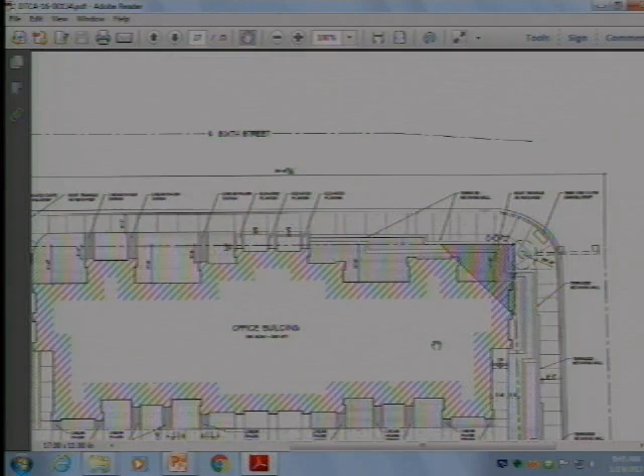In the previous design, when the retaining walls were curved, it looked like there was a larger distance between the sidewalk and the walls.

No, are the new walls any further out? The only place, and I say no. Let me recount that. There would have been a place that, when we relieved the inside of the curve, that would have given more relief, which was also why we chose to go that direction at that point. And my client actually liked it quite a bit and argued with me when I went back to show them, hey, we need to do this.

I left this meeting thinking, okay, you know what, I think the comments that you guys gave were constructive and certainly helped us get to what I believe to be a better solution here. I think this does do the things we're asking it to do from a design standpoint. We're asking it to be more like the building and kind of transition you to the street level, so I think we've achieved that.

But we do give up some things, with the kind of linear shapes of things, yes absolutely, we give up some of that relief off of the street. I think aesthetically it's a great improvement compared to before, having the site match and work with the building design.

I'm not as... so on 6th Street, that sidewalk, the way it exists right now is out at that curb line, and given the setback of the building on the site on 6th, you experience some relief on your other side as well. So I'm not terribly concerned with Sixth.

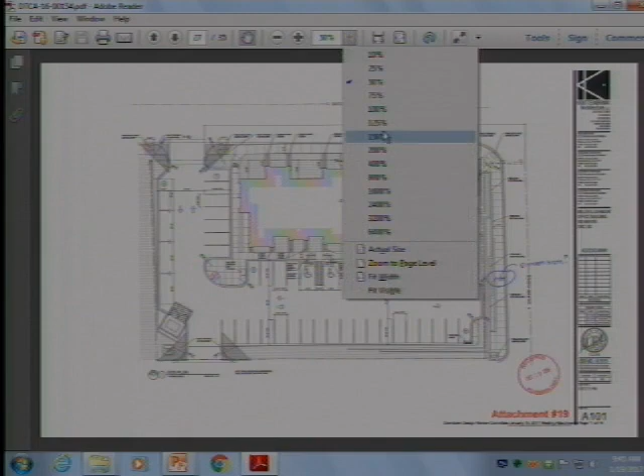The pinch point on the east side, I could see that getting tight, and certainly with the retaining wall on your other side, you get almost a canyon effect of street on one side and retaining wall on the other. So if there's any way to pull those walls in tighter to the site, I think that would be beneficial to the sidewalk experience.

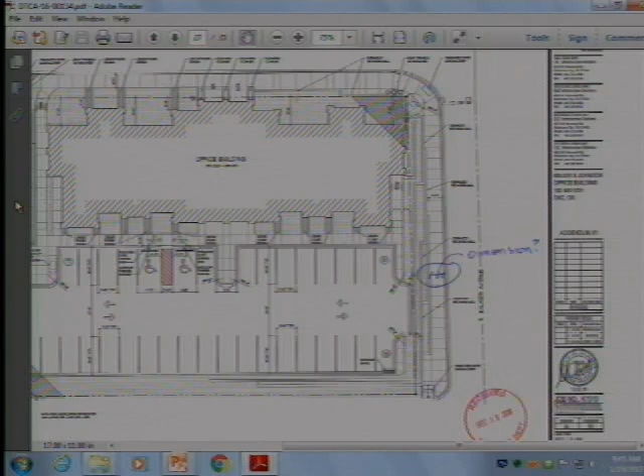It comes in an aesthetic, I think it's going to come in an aesthetic cost, because the terracing is what we're basically disguising. I mean, if you want me to remove the terracing, then we're going to have a wall, and none of you are going to like that wall. You know what I'm saying? So I'm relieving the eye with the terracing, relieving that aesthetic. I believe there's just a small amount of give and take here.

It's either we can go that direction, give you more room on the sidewalk and remove some of that — it's going to be less cost to my owner, he'll certainly be happy about that, because cost is certainly an issue in all of this. Some of the comments that Connie's made here relate to going to cast in place. That sounds all good and well, but you're talking about at least a couple of different disciplines as well. So this stacking of this type of stone, the cost is in the material, not in the labor. The labor is very cheap to stack this kind of stone, and it's very adequate for what this use is.

Is there anything planned around the parking lot as far as a guardrail condition or? There are not. Code-wise, we do meet the requirement there — that's the 18 inches of fall, 30 inches out. So we meet the requirement.

However, I'm not opposed to adding a couple of bollards there just to put everybody at ease at the end of that hammerhead. We could certainly do that — I would say probably three, two at either end and one in the middle, would probably cover it.

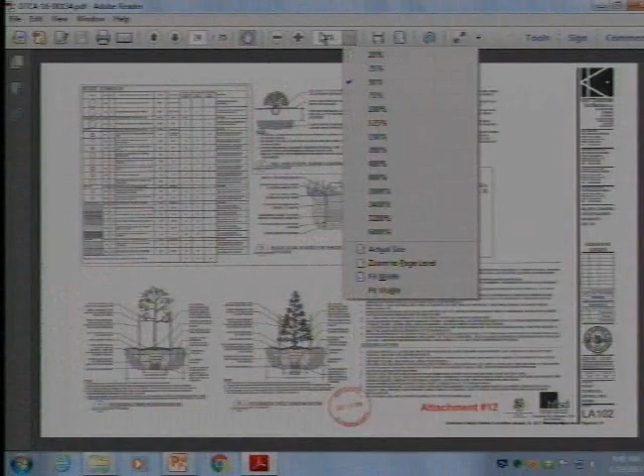Well, I'm with Betsy. I really like the design. I think it's a dramatic improvement, and it really dramatically highlights the building. I don't think there's an enormous amount of pedestrian traffic there, and I don't think there ever will be, so I'm not that concerned about the width of the sidewalk. So, I like what you've done.

Do you want to make a motion or anything like that?

I just have a couple of comments. I think the materiality, I understand the cost, but I still am not on board with the materials. I guess I tend to agree with Connie that it's still kind of residential looking block to me, and I don't see the relationship between that block and the building. Is there even the scale of the block? I guess that's a good question that Connie had about the materials.

Similar in scale to the cast stone, or is it the typical CMU? The cast stone is 1 by 2, so 12 by 24, and the block is going to be 8 by 18, so it's a larger linear piece as well. I think scale-wise it's appropriate. Each of these blocks, this is not residential. This is not something you could use in residential, you wouldn't want to, it's just too costly. But they're 80 pounds a piece. They're literally a massive block. So I don't think they're going to play that way.

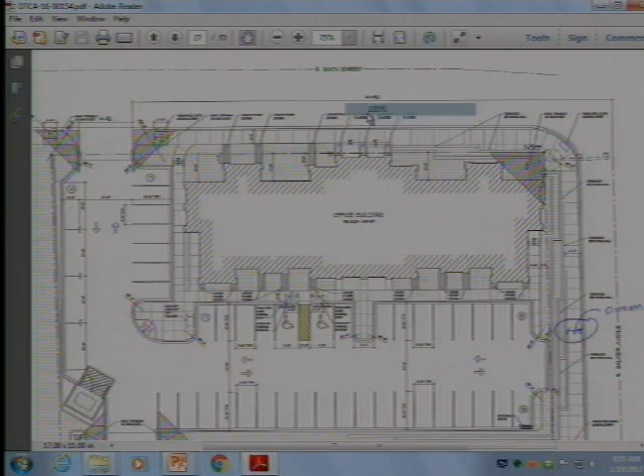It would have not allowed me to have an entrance on the north side of the property there. I mean, you can see how tight all of that is. I am crammed on this thing at all angles, really. And then I'm required also to be within that 10 feet, which we had to get a variance for, those kinds of things. So I'm jamming my building up on this corner. It's obviously going to make me have to react—it's forced congestion, if you ask me.

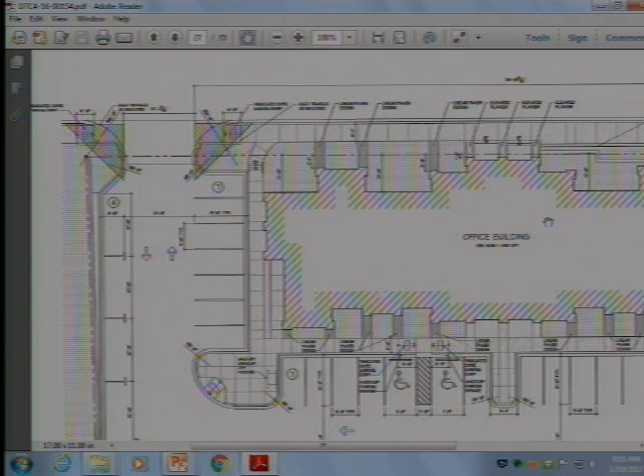What I thought about that—there are ways to site that potentially a little bit differently, but the only space that I have really is coming back further, which would then cost me more. Coming further south—I'm sorry, not really east to west. East to west, there's just not much there, guys. I don't know what else to do with it.

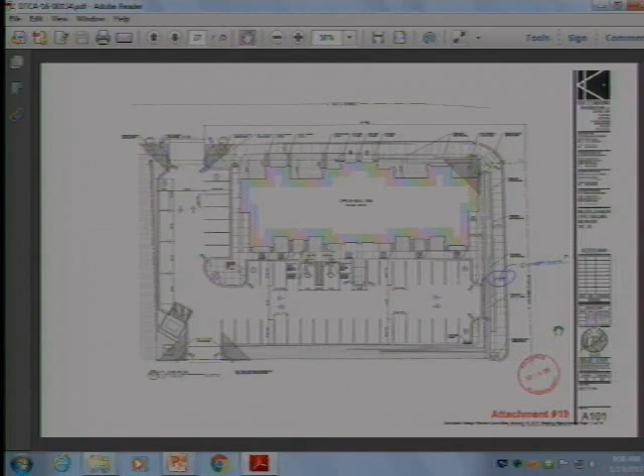Now, the other option, the give and take of that, is the aesthetic of the terraces. So if that is something you guys are interested in, we could certainly remove a couple of the terraces or something and gain you back a foot and a half. Which is worse, I mean—that's what I'm saying. Have a 10-foot tall retaining wall? That doesn't sound nice either. So that's why I chose this compromise.

Thinking in that vein, thinking okay, 6'3" at its smallest point—I get it, I certainly think that's a little bit tight, and in a perfect world it would certainly give you more relief. This isn't that situation, sure. And so I thought, okay, we'll go full aesthetic. We'll give them something nice to look at as they walk by.

I want to pile on to that and just say the sidewalk width bothers me, and certainly the building could be moved south. And when it comes to the east-west orientation, I guess I'm not understanding—couldn't the building just be a foot narrower? There's lots of ways to give another foot or two. And the texture, I agree with Connie's comments, just the kind of residential feel—it seems like it'd be a much better fit if that same material were continued through.

And I understand the transition sentiment, but at the same time I just don't feel—most buildings that I can think of, that transition's not really part of it. You have an urban structure, it has an urban feel, it comes out of the earth, it comes out of the pavement that way. I'm not seeing that side of it. I'd rather just see that same material continued through. The terracing's fine, I think that's a good way to do it, but I would like to see more sidewalk width on those two sides, and the same material continued through. So I just want to reiterate, that's where I'm falling on this issue. The flatness of it is in the material, the texture of that material, and that being different.

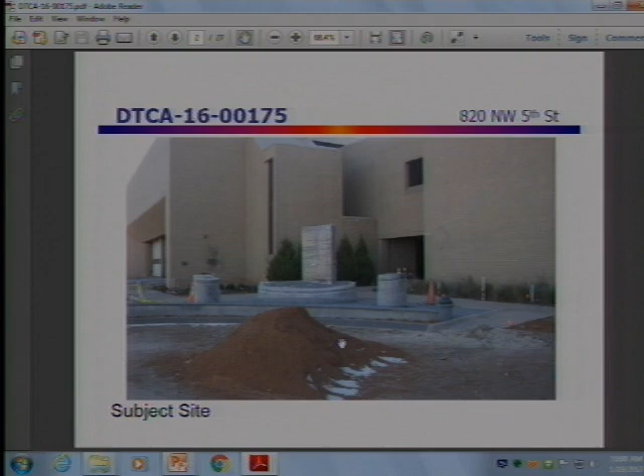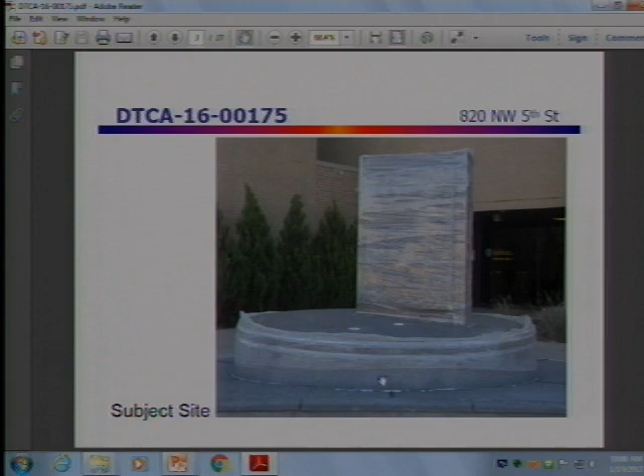It will have a monument similar to the one you're seeing here that has the names of firefighters who have lost their lives in the line of duty. There will also be a statue of a fireman. And we have 2 landscaped areas. We referenced in the staff report that their drawing only had the one here on the left, but they also added an additional landscape area on the other side of the monument.

We had a concern over some of the material they were proposing. One of our biggest concerns dealt with agaves. Don't get me wrong, I'm a real fan of agaves, I used to have them for about 20, 25 years until I moved to Oklahoma, and then they died. One of our concerns is the hardiness of them in this environment, and the fact that there was a better time of year to plant them, so they had a hard way to go to start with, as well as they will get big. They potentially can get very tall, very wide, and where they have them planted is right next to the sidewalk. They have thorns on the end and saw teeth down each leaf, so they're not necessarily people-friendly, and what we're designing here is a people-friendly monument. People come up, we want them to experience it, so we were concerned about that and pointed it out.

Most of the landscaping is not specifically referenced in the recommended material, but different varieties are, so I rely on our landscape people to assist us with that. Connie did make comments that you have been given a copy of, and I also provided a copy of that to the applicant. Staff is recommending approval with a condition that the applicant submit a revised landscape plan to staff to resolve some of those issues, if you all agree that there might be some better plants utilized in this area. There is irrigation that has been put in.

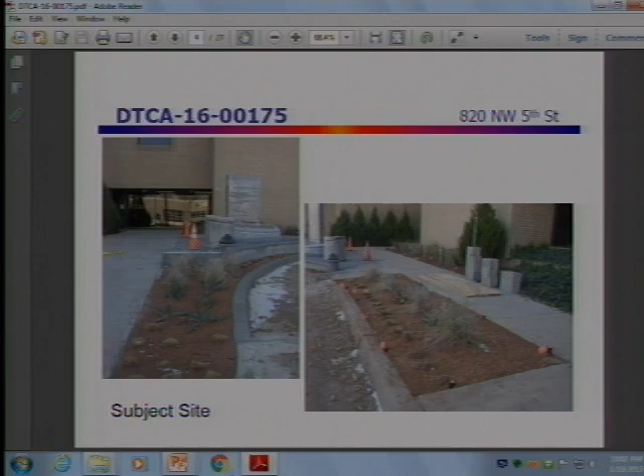And... very cool. So can you tell us a little bit about your project? It seems like it has a story.

Sure, it does. I'm Brian Stanland, Battalion Chief of Support Services, 26 years with Oklahoma City Fire. The actual monument you see, the large pedestal standing up, is a piece of the Alfred P. Murrah Federal Building. It's not in that photo there, in that photo there. We've had that for a number of years.

But you see where the kind of blaze orange cone is? It was back there behind some plants and didn't have a prominent place. So this area where we've redesigned and done construction was simply grass with nothing really aesthetically pleasing. We wanted to give that monument a prominent place. It already has the names of our fallen firefighters, those who've died in the line of duty since our inception in 1889.

The firefighter you see there, we are privately raising funds through the Board of Chief Officers. We commissioned Shala Reynolds, a prominent artist here in the city who's done a lot of firefighter work. Her husband is a retired Oklahoma City Battalion Chief as well. The firefighter is in his full gear, helmet off under his arm, reaching out, paying homage to those who've died in the line of duty. It's a very emotional piece for us.

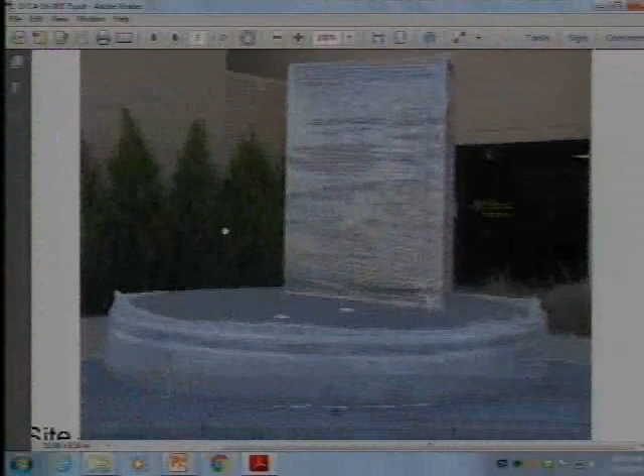And then the statue is being constructed by Shawla Reynolds - that's where we are right now. That piece, they lifted with a crane off its back pedestal and placed it there. It's glued in, as well as inset into the pedestal itself - they designed that in the design. The two little white cups you see are where the firefighter's feet will be anchored into the piece.

And it is sprinkled - we've had a sprinkler system there for years, but it wasn't operational. Building management did some work and brought that up to par, so everything will have a sprinkler. It'll be sprinkled as well.

And I have to ask this question because I've learned about this - did this have to go before the Oklahoma City Arts Commission? Yes, we did, and the Arts Commission has recommended approval. We realized, too - I'll just ask for forgiveness now - we got ahead of ourselves on this and didn't realize we needed to go through these commissions, so my apologies for that. We realize we've already basically constructed it.

One thing he did clarify - I think Connie referenced a sweet gum tree. Yes, the sweet gum tree has been removed. The sweet gum was further out toward the street, growing in a wild fashion - I've learned this now. Hang on, let me find a photo of where it would have been. This picture that I included - right there, you can see it.

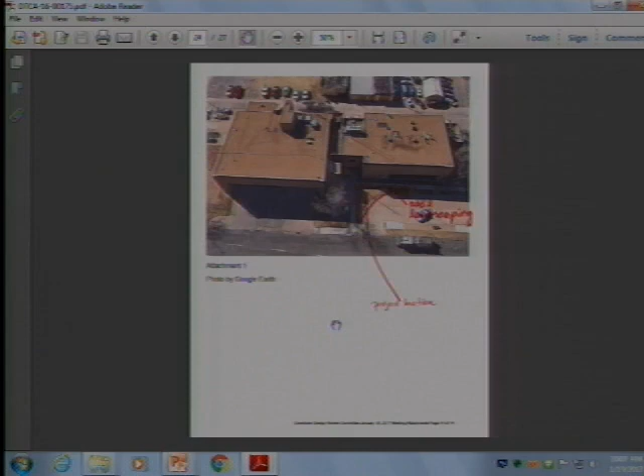That has been removed - we got help from Parks to cut that down. So now that area is simply sodded. We're thinking in the future we may do something with that sod there, but that tree wasn't in great shape - it was growing toward the building and over the street. Also the roots were coming up, making it very difficult to mow under the sweet gum, and it drops those funny little thorny things. So we got rid of that.

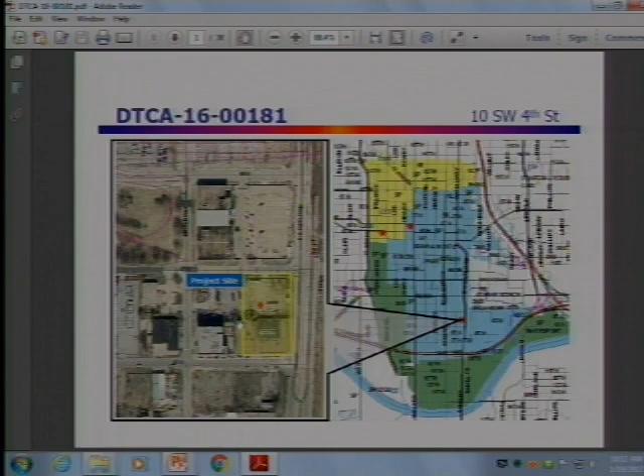So, in the staff report, let me flip to this. We referenced several things. One is a variance is required for this site, and that is because they have literally an entire block, because they're going to have streets on all four sides.

Our ordinance requires that the building has to be no more than 10 feet from the street right-of-way. That requirement would make them have a building that's literally the size of the block. For a hotel, obviously, they want to provide some on-site parking. They reference in their statement that they will have provisions for off-site parking as well, but for their current design, they wanted the ability to have some surface parking to start with. They also are allowing themselves the possibility of having another building pad, to have a building and/or structured parking at some point in the future.

This is obviously park construction we're seeing. We're going to start seeing the rails go down soon for the streetcar project. They're working on the streetcar maintenance facility in that area as well. We had the presentation just a few months ago on the convention center, so all of this stuff is happening, but it's not there yet. So obviously, in a few years from now, there's going to be a different dynamic in that area, which will hopefully lend this property owner to be able to continue his investment in that area.

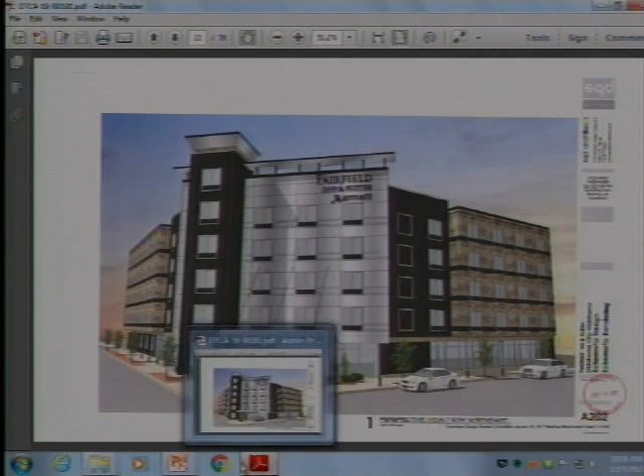And other than that, staff recommended approval subject to the conditions that they obtain a variance for the maximum setback. They also need to address an alley that runs through the middle, and when this project was originally approved, there was discussion because they had thought it had already been vacated. The city has no documentation on that, so they'll either have to get that documentation from district court or go through that vacation process, since their layout crosses the alley in the middle of that block. So we have those two conditions, and that's one motion, and then the second motion would be your recommendation to the Board of Adjustment for the setback.

Okay, so it seems like we really need to know a little bit more about what's going on in the area. Where's Broadway going? Can you show us any kind of drawings that show where the convention center and the convention center hotel are?

Using this one, the Convention Center Hotel reservation site is this block here, which is between Robinson and current Broadway. So that block gets bigger, is that what we're saying? Broadway here at 4th is being relocated half a block to the east, and then will go south. I don't know if it ends up going south all the way to 7th Street. I think it does, and then that's where it jags back over.

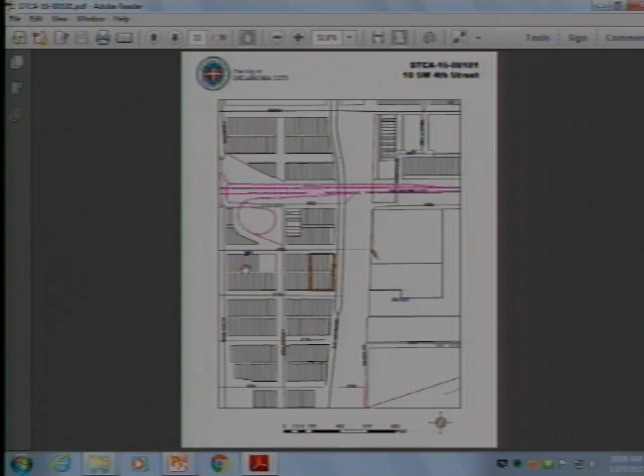Okay, that makes more sense. Does that help? Yeah, I'm sorry, I should have included that one drawing I have from the past where I've marked everything up for that whole area. I didn't really think about it, but it is better that there's building on Shields instead of a parking lot, though it depended on what Broadway was, and it seems like Broadway's going to be kind of a back street.

Yes, because... do we know yet how the Convention Center Hotel is addressing Broadway? Not yet. Okay, I remember you made that comment when they did their presentation, so we haven't gotten anything more since then. Okay, so I'm not trying to push any agenda forward, but it does seem like the convention hotel would need to push up to Robinson.

Robinson then becomes the really important street. Yeah, the convention hotel is going to take up the whole block. So I would expect the emphasis of the hotel to be on Robinson, given the emphasis of the convention center being on Robinson, right, because you won't be able to see the convention center from the boulevard. The convention hotel is going to be the beacon of here's where it's all happening, at Robinson and the boulevard, that corner. So I think it's a good solution for that perspective.

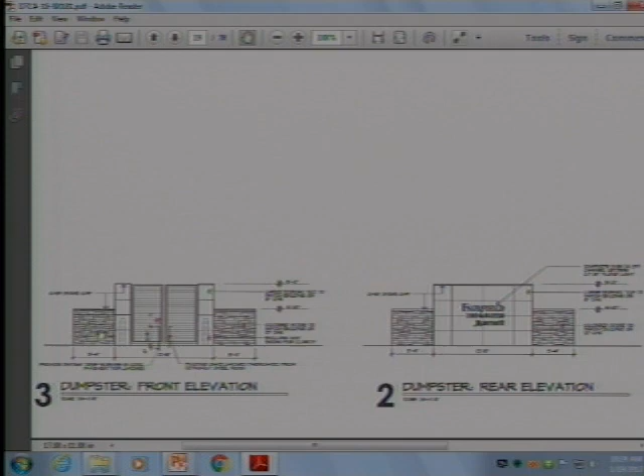We agree wholeheartedly, and really all the brand requires, or Marriott requires, is that they put an 8-foot-high CMU enclosure around that. What we really did, and we've got some elevations to show, we treated that more like a design element on that corner, so that dumpster enclosure facing that corner has signage to the front. The back side of that is the dumpster, and it's the same material as the building. We wanted that to become a design element to hide the fact that there was a dumpster there. Now, of course, when you're in the parking lot from the other side, you'll see it's a dumpster. But we did try to address that, and we can continue to look at that to make sure it does not appear like a dumpster from that very important corner.

What's the fence that's going to go around that parking lot? I haven't been able to find anything on it. The fence is based on Marriott standards, largely. That can certainly be addressed as we move along, and it will be included in the landscaping plans.

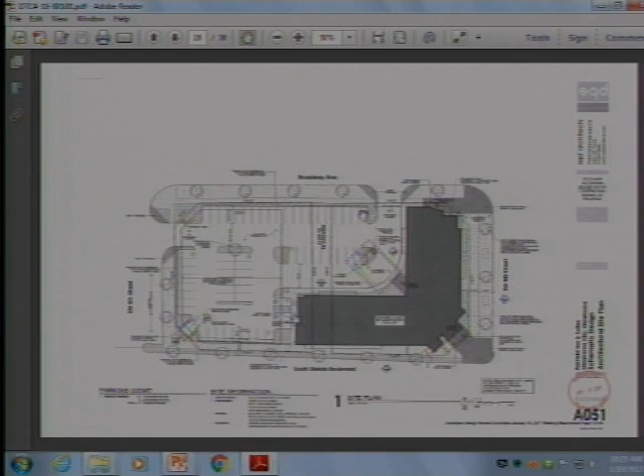The owner has a separate consultant for that, so they'll be submitting under a separate application. In the write-up, they indicate the required parking lot screening shall be accomplished by 3-foot-high decorative pre-finished metal fencing. Bear with me, let me figure out which sheet that is and flip to it.

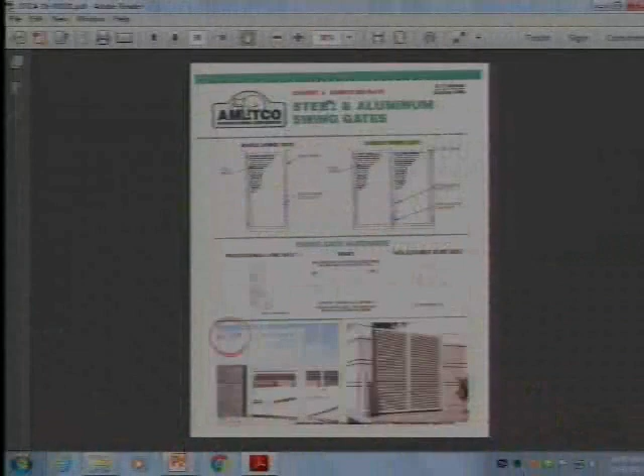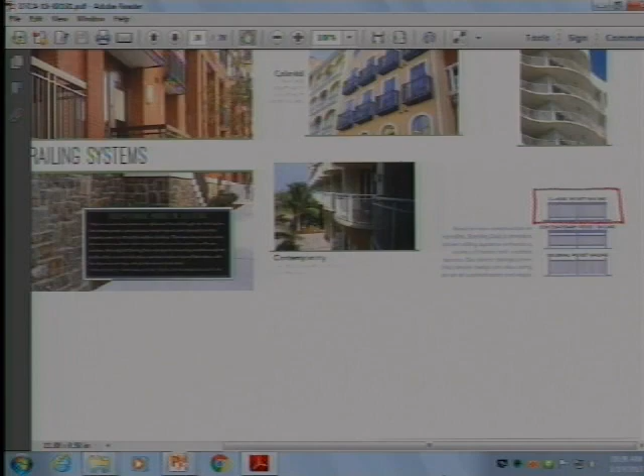That's it, you found it? Ding, ding, ding. They show samples, more like what you can see on balconies, and they've circled the one they're proposing. Can you blow that up, please? Yes, I can pull it up.

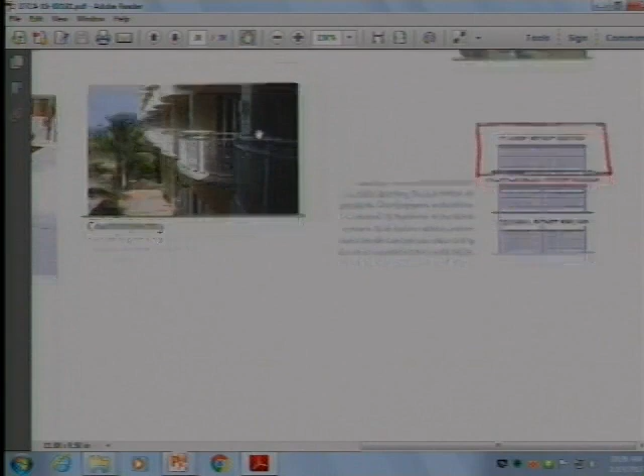So most like that top left photo? It doesn't have the rail, the double rail. So it's like a single rail, like this one, and it's 3 feet tall, which is what's required.

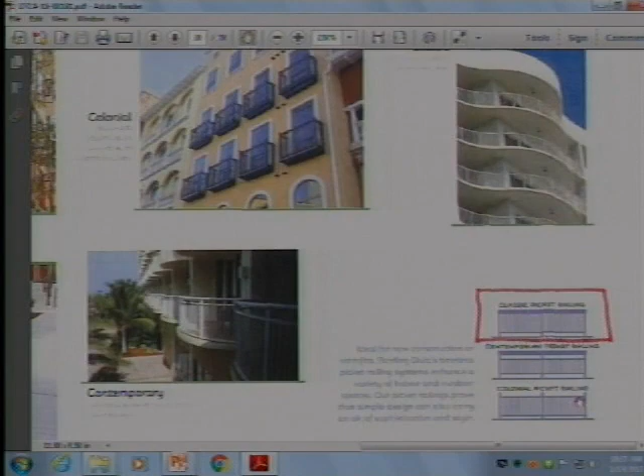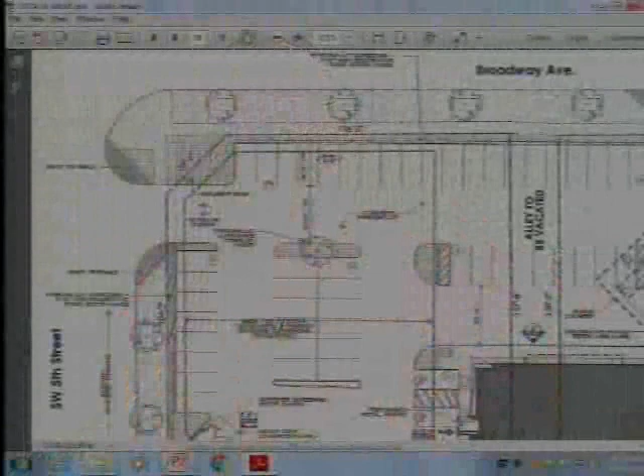And that occurs on the west, the south, and the east property line, pretty much, close to it. Yes, it's required to be around the... let me get this bigger. Because they have a parking lot screening, you can see the notation and the round. So it's across the west side, across the south side and goes down to the dumpster enclosure, and then it picks up here along the east side.

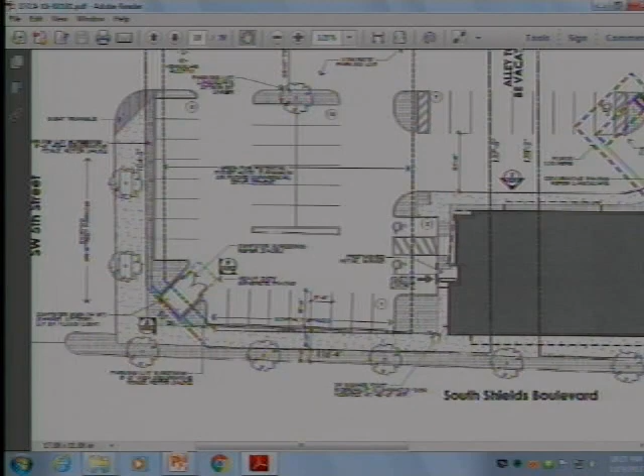The requirement is to screen parking, that's why we have the fence in the first place? Or is it required to be around the area? Either have a barrier, if parking is adjacent to the right-of-way, the requirement is that they have either the 3-foot-high fencing, or a 2-foot-wide landscaped area. Those are the two choices, and so they chose to do this.

And the fencing, sorry, it's probably in the packet. Does it have a sight-proof or spacing requirement? No, it does not have a sight-proof requirement. It's for a barrier, to make a distinction. It's not required to visually screen. I see.

I always prefer to visually screen the parking. Maybe the guideline could be explained more - I don't understand necessarily as much what the fence... I think 'screen' was probably not the right word. It's really a barrier, as Laura was pointing out. And we're really kind of viewing this as a temporary solution for parking. I don't see this parking remaining once this area starts getting really developed. It'll either become structured parking or probably another hotel or retail building. I don't know how long that will take, but I really see this as more temporary.

Just a couple questions about materials - it looks like the elevations call out for stucco, tile, or similar, but by the materials packet, you've chosen tile. Yes, all tile. So the only materials we have are tile, metal panel, cultured stone, and glass, including the soffit.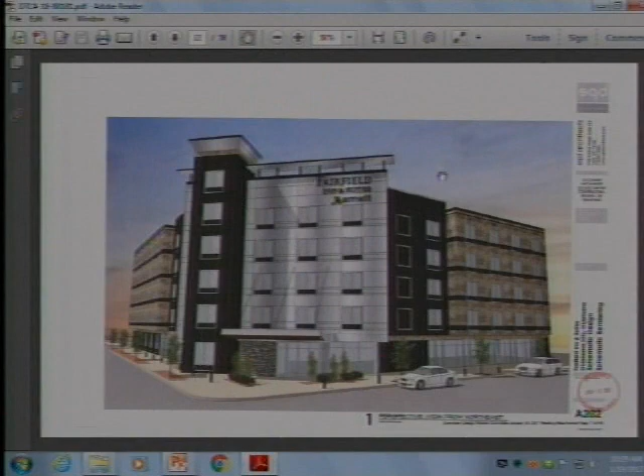We did have a comment, I don't know if we want to read this - from Connie Scothorn, not my comment, but she says: I'd like to hear what the architects have to say about this. I'm not a fan of cultured stone, especially downtown. It's a pretty nice site to be building a suburban-looking hotel. I'm not a fan. I wonder, since there's not that much of it, is there a potential to use a different material than the cultured stone? I think there certainly is, and I did receive Connie's comment prior to this meeting.

There is a very limited amount, and what we're showing is kind of what Marriott sees as their iconic facade for the main entry, that porte-cochere. They're calling that one of their iconic pieces, on this Marriott Fairfield Inn and Suites. I don't think they'd object to us using an alternate material there, either metal panel or a different color tile or something. They do want that piece distinct in the front and back, but I don't see that being an issue. I think we can probably get them to look at something.

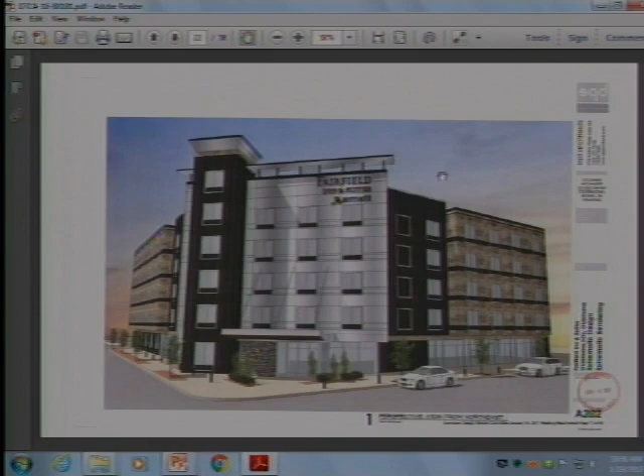I agree with Connie, I'm not a fan of the cultured stone either. If that's something that could be addressed, I think that'd be great. From Marriott's perspective, they don't want this to compete with their higher-end product. They want it to look like their prototype Fairfield Inn and Suites, which it doesn't. I don't know if you have their prototype with all the Dryvit, which we really don't like at all. So again, it's about maintaining those iconic pieces, but I don't think they'll have an issue with it.

And Danielle, I wanted to read what the ordinance requirement is, because where a parking lot abuts a street frontage, in order to create clear separation between the sidewalk and the parking lot, either a decorative 3-foot-high wall or fence constructed of approved building materials, or a 2-foot wide irrigated landscape area, shall be installed and maintained so as not to encroach upon the public right-of-way. So it doesn't require screening, it's just for separation.

And did the staff report say that this screen meets that? It does. Okay.

I just want to reiterate that I agree about the cultured stone. I just don't see that as a material that we want in this important location in downtown. Sure, certainly. So an alternative would be appreciated.

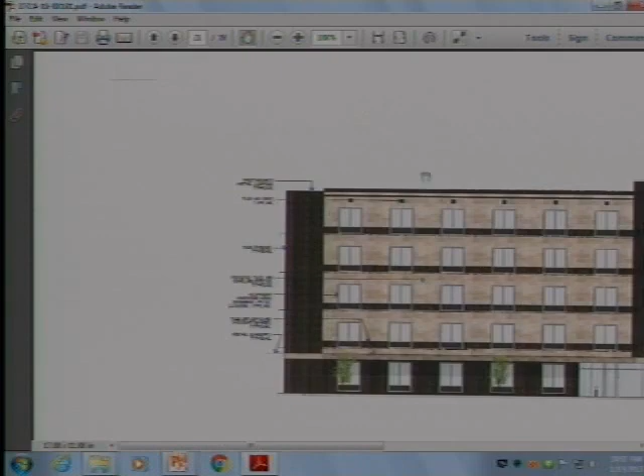You bet. So what I'm seeing on your elevations, you've got aluminum storefront, stucco tile, and it looks like the black is a tile, then metal canopy. On your north elevation, it looks like you have storefront, but it says cultured stone canopy supports pointing right at the storefront. Is that right? Oh, this one right here? Yeah, that's a storefront, right? Yeah, that's storefront, that's aluminum storefront. That's just a misnote.

I just wanted to make sure we didn't have a solid wall of cultured stone there. Absolutely not, that's all aluminum storefront. Okay.

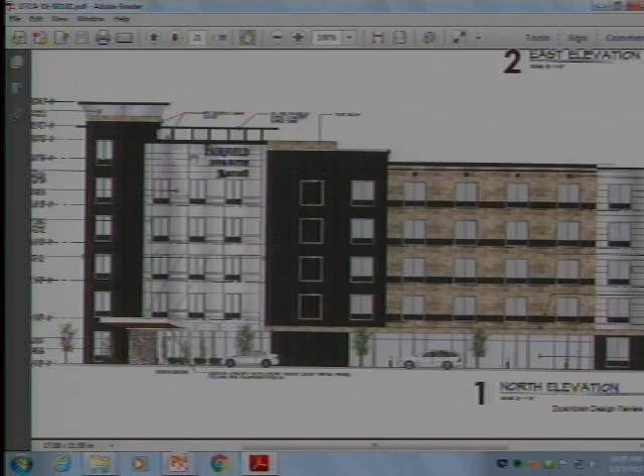Just to be 100% certain, there's no stucco on this project. No EIFS either? No, there's definitely no EIFS. The reason we put stucco and tile there is we were still looking at options for the varying colors. I think the reason I said we're good with tile is I'm pretty sure we can find a tile in that color. We just want to make sure there's good contrast, and it won't necessarily be modeled like that - it's kind of shown modeled. You'll perceive that it's different, but as far as stucco, I think we are allowed to use that.

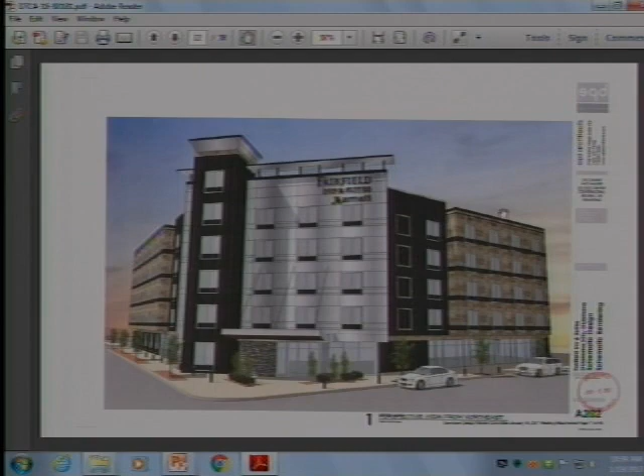There is stucco, and I called that out in my staff report because I took that from their design statement, if I'm not mistaken. Okay, if it's not clear to me exactly where it is - all the dark material I assume to be tile, and the lighter would be, if we did do stucco, the lighter would be the stucco.

And we're really at a pretty early design stage. When we start looking at cost, that's always a consideration. Stucco versus tile - if we can save the owner a little bit of cost using stucco and it looks remarkably similar, that's something we would want to consider.

Okay, on the elevations, just to show you where it actually says it - throw that up - the arrow right here says stucco tile or similar field tile, for that lighter color. Oh, so it's stucco tile, not stucco, for the lighter color.

So that's something you'll bring back when you decide your final material, and bring it to Laura, probably? Certainly. That's something we can do administratively, right?

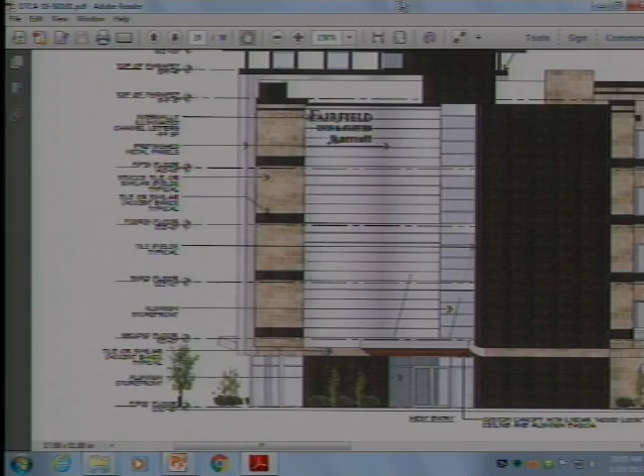About what page? How many pages? A large format exterior wall tile. Okay, let me get there. You see that, Danielle, where is it? Yes, that's the tile that we're considering using.

Yeah, for the light color. Okay, I understand. Sounds like maybe we're still considering materials. We don't have a decision on materials yet, so we may need to still see what's being decided.

Paul, your choices for this beige area, you were at some point suggesting it would be stucco or tile. Correct, or something similar. Right now, today...

I think it'd be helpful for the committee to approve something, and if it changes later, we can change. Sure, and I guess that's my point, from what I understand and what I've read, stucco is allowed. We're still working through costs and things like that. We're at a really early design stage, so we haven't gotten into a lot of costs. So what I'm saying is it's going to be stucco or tile depending on cost.

Right now, today, what do you want them to consider approving? Or both? Do you want them to approve either or just one, and then come back and change it? I would like, if stucco is going to be an issue in the future, I would want it to be approved with stucco.